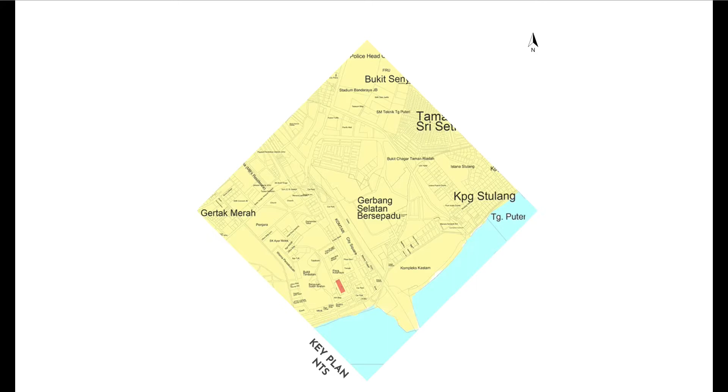Our site is located in Johor Bahru, specifically along Jalan Duke, Johor Bahru, near the Istana, UTCJB, Masjid India for some context. The genius loci of the site, in my opinion, is the creative and textile commerce. As you can see in the location plan, I have noted down the heavy concentration of textile trades and services available in that area, giving the site a unique character.

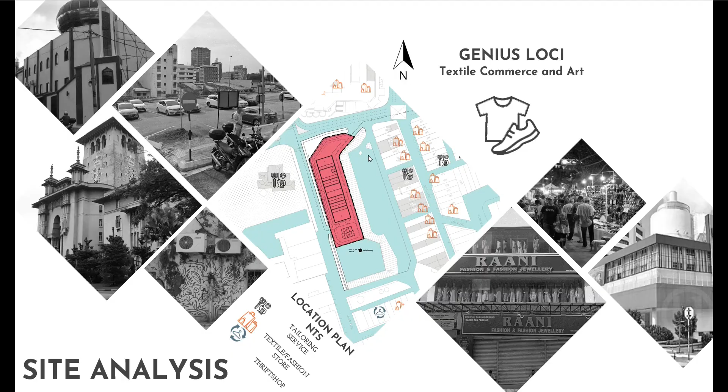There is also a large number of graffiti along Jalan Trus's back alley, which I think is quite special to the site. For the SWOT analysis, the strength of the site is that it's within a commercial area and tourist zone. It attracts pedestrian and vehicular traffic. It also has great views all around and is strategically located near Singapore.

The weakness of the site is that it's long and narrow with only one-way traffic around, and is also prone to vandalism. Opportunities are that the site can become a catalyst for the local economy, a space for public such as art events and so on. The threat is that the city is prone to urban sprawl of people moving away.

The issue of our site can be summarized as a dying economy, lack of art spaces and public spaces. Let me introduce our client, which is MAGIC, Malaysian Global Innovation and Creativity Center. Its goal is to build a suitable entrepreneurship ecosystem and catalyze innovation and creativity for an impactful economy.

My approach for the building is a little different. I chose fashion as my main niche to respond to the site context. Fashion can rejuvenate a city, such as in Milan, Paris, New York - it's all fashion. It supports the local economy, and as you know, fashion is universal. Also, the site is located in close proximity with international scenes such as Singapore.

Next, my concept is Woven Dreams. Woven is defined as a form by interlacing long threads, forming a complex storyline and pattern from the interconnected elements, and dreams are cherished ambitions.

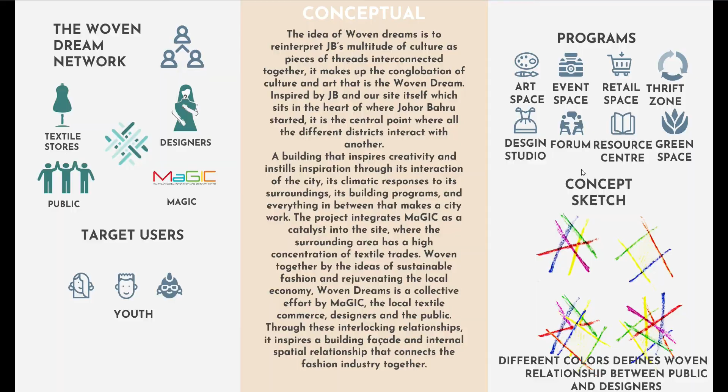On this slide, you can see the design sketches that I had throughout the project. And next, let's get into the building massing.

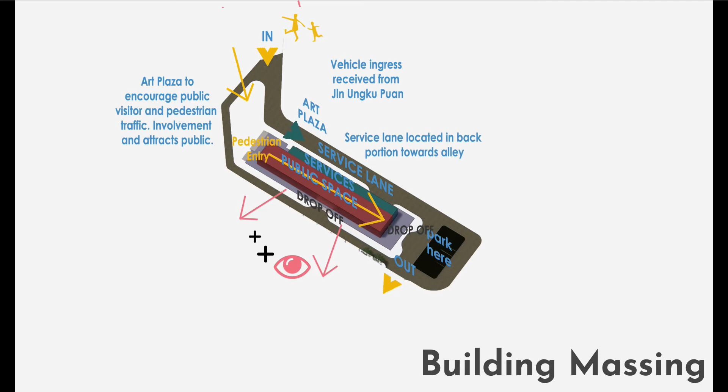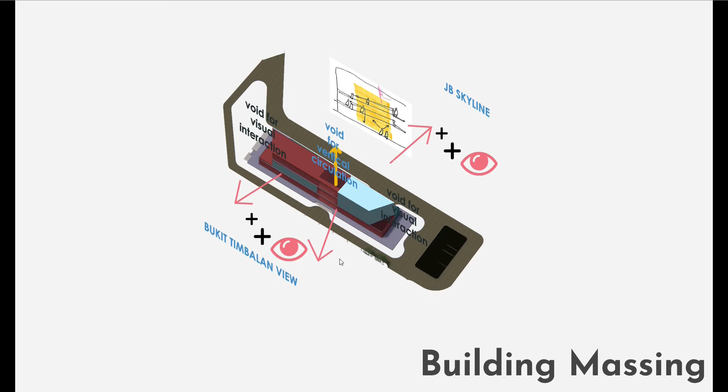I decided to allocate a plaza along the street level of Jalan Ungku Puan, where the building starts with a mainly ground floor with services allocated on the side. Next, voids are introduced into the massing, allowing visual connection of the spaces, and also to capture the great views of JB. Green terraces are also introduced for a comfortable working environment. Next, the structural system and the roof, which I will talk on more later.

At this street level, visitors are greeted by an interactive art space with installations from local artists, and the colorful shingle roofing can be viewed from this direction. The one-way vehicle lane separates to a service lane and a lane for drop-offs and parking. Due to the site's long nature, there are two drop-offs available.

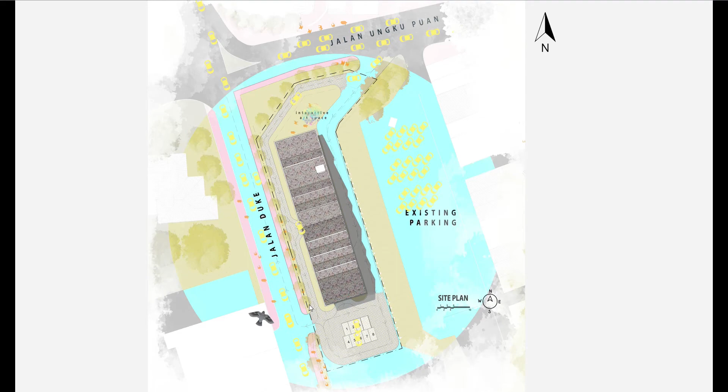For egress, you can easily exit out into Jalan Duke. I have shown the long ground floor area as a public area, kind of bridging a connection between the city. It contains a cafe, retail spaces, event space, thrifting areas. The services are also allocated at the side.

There are vertical circulations at the center and both ends of the building connecting every floor. On the first floor, there is a semi-public discussion room, meeting rooms, lecture rooms, and private spaces are the Magic office, and there's also a fun shed, hammock area, and a terrace garden.

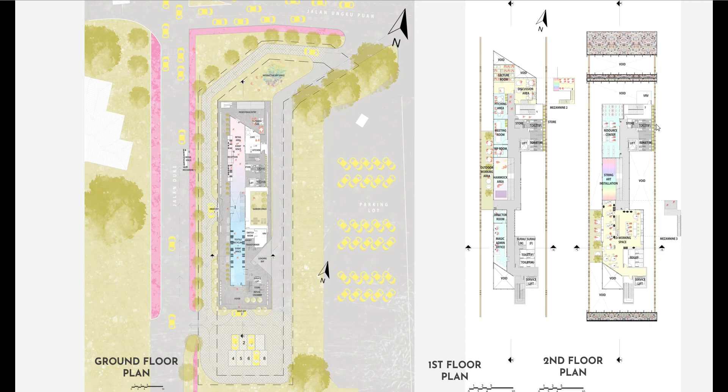On the second floor, there is mainly a string art installation you can see, a semi-public resource center, and the co-working studio space, which is private with an attached garden terrace.

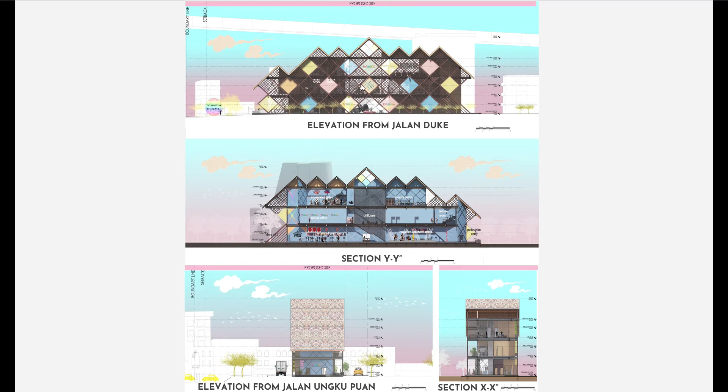This form is actually inspired by the site context, Bukit Timbalan, and the shophouse form, where the building also utilizes sustainable materials such as recycled PVC for the roof, and the large roof surface also allows for rainwater to be collected.

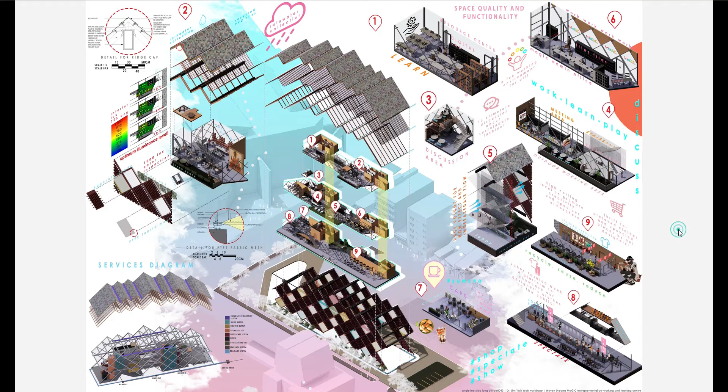As you enter the ground floor, which is a dedicated public area, the long space is inspired by a catwalk and acts as a multi-purpose event space, retail space, and thrifting area. These spaces are columnless, allowing a multitude of different events to be organized.

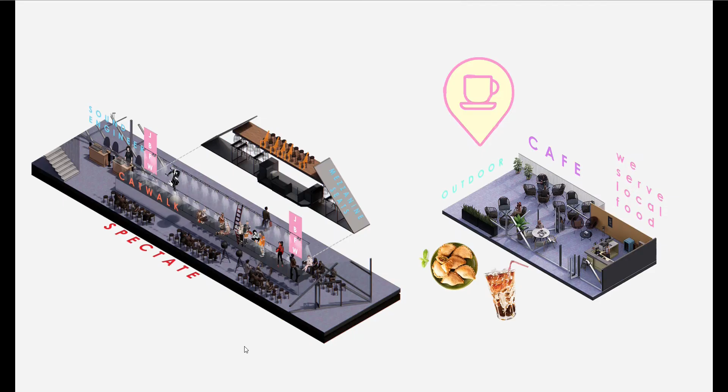Huge voids are situated at all three entry points, connecting the public realm and designer's visual connection. The public spaces are naturally lit and ventilated, bringing the space alive during the day, where the services are located along the side. As you enter the second floor, there is a huge void and shared hammock area, allowing for fun interaction of the users.

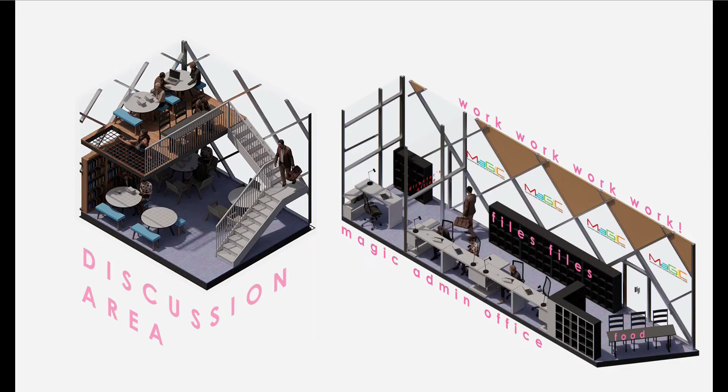There is also a green terrace here. The ceiling height of every room is also high, as this is proven to boost creativity and productivity, and you may even have a hanging art installation as so.

Next, let me talk about the co-working spaces a bit. As you can see, I've attached the illuminance study analysis on the axonal of the co-working space. It achieves a good reading of around 525 average lux, which is optimum for the textile industry.

In this space, I've also attached a mezzanine for chatting or rest, as well as designed a textile rack along the curtain walls. The green terrace not only acts as a green space, but you can have your color inspection or other activities that require higher levels of lux.

This room also acts as the basis of the entire solar shading device that I analyzed and implemented throughout the facade. Next, for the structure, I utilized this steel diagonal 500 by 300 mm frame structure.

It's tied together by a hollow steel beam which holds the roof, which is a timber structure consisting of the horizontal and vertical battens and the recycled PVC shingles.

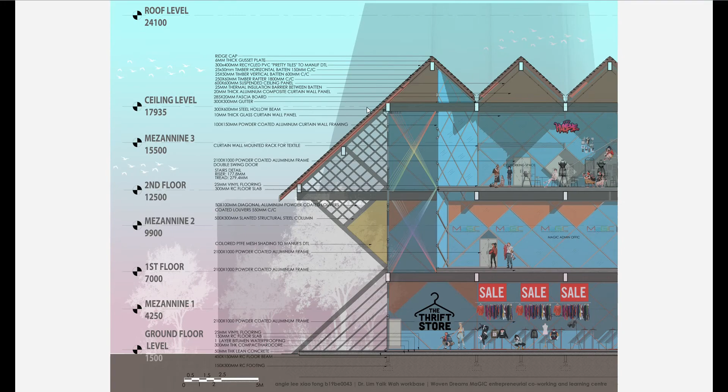Next, let me go through these axonals again to showcase the spatial quality of all these spaces.

And now I will be playing the short video animation fly-through of my design.